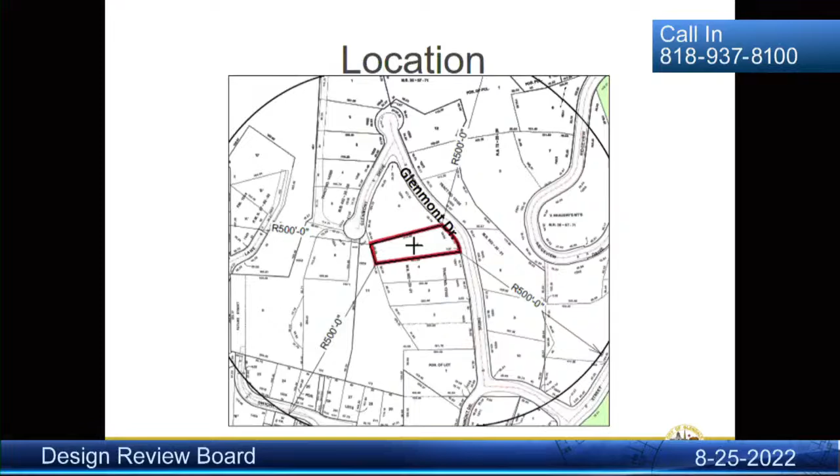The subject site is a 16,950 square foot interior lot located north of Mountain Street, near the northerly terminus of Glenmont Drive on the west side. The site is located in the R1R Restricted Residential Zone, Floor Area Ratio District 2. This zoning allows a 15-foot front setback and a maximum total floor area of approximately 4,700 square feet for this site. The existing house is approximately 3,000 square feet, which is currently consistent with the other homes in the neighborhood. It was built in 1947 and added onto 4 times over subsequent years.

It is one-story, which is also consistent with the neighborhood pattern, and has an attached 2-car garage extending from the front facade and facing the street. The site slopes somewhat at the street front and rear of the property. At the street front, it slopes upward towards the north and parallel to the street. The site also slopes up steeply toward the rear of the property behind the existing building pad.

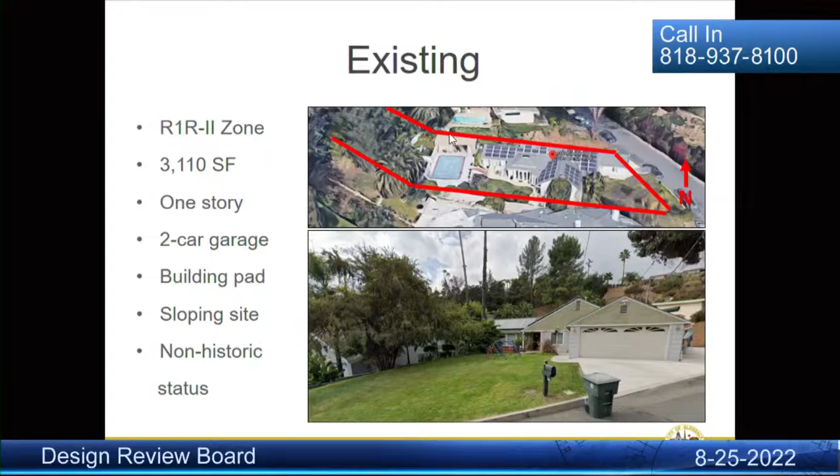The property does not appear to be eligible for historic designation and is not considered a historic resource under the California Environmental Quality Act. These photos show the site conditions as viewed from the street and as viewed from the rear of the property on the lower right.

The board decision for the project was to return it for redesign to address 3 main comments: one, reduce the mass and size; two, redesign the project to eliminate the second floor, possibly by creating a basement level to retain that area's proposed uses; and three, coordinate the fascia lines and wall heights of the addition with those of the existing house to provide better design integration.

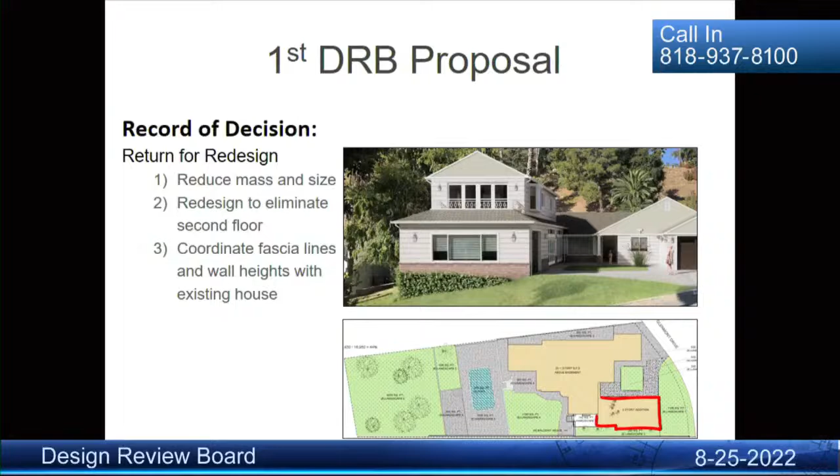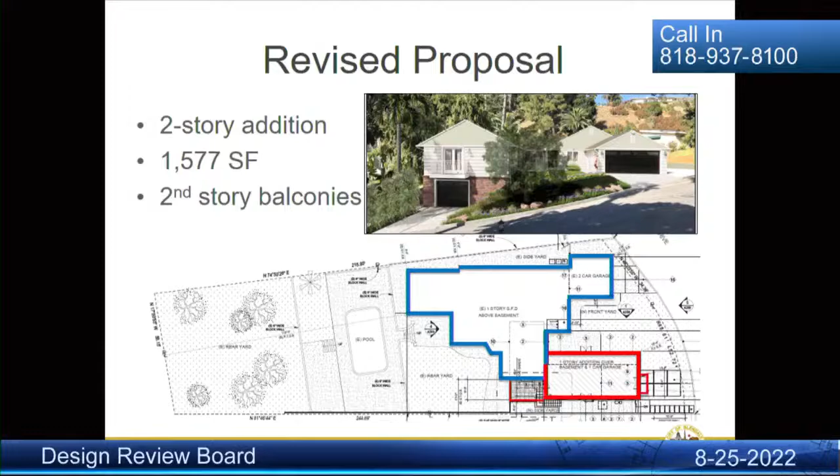In terms of site planning, the addition is located in the front yard of the subject site, extending toward the street from the front facade. However, it is outside of the front setback and behind the front facade of the house adjacent to the south. Although the new one-car attached garage location at the front isn't consistent with the overall development pattern along Glenmont Drive, it is consistent with the adjacent house to the south.

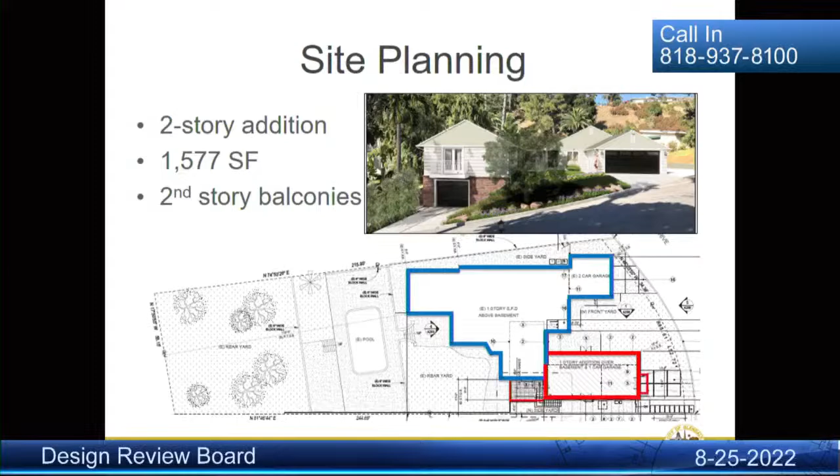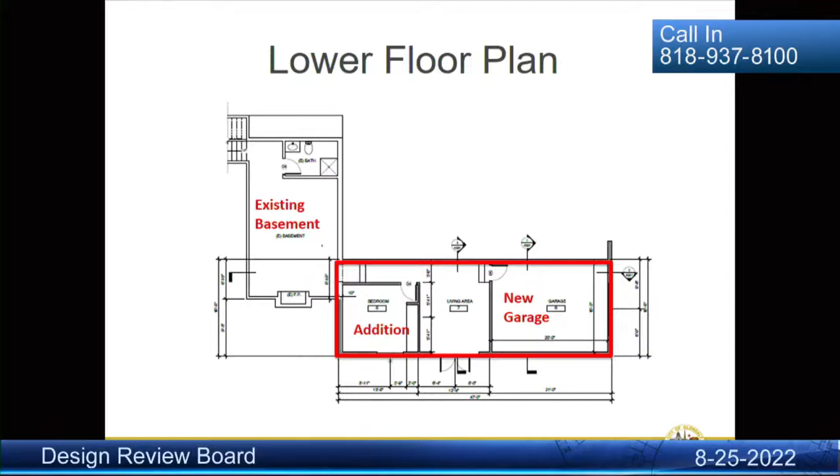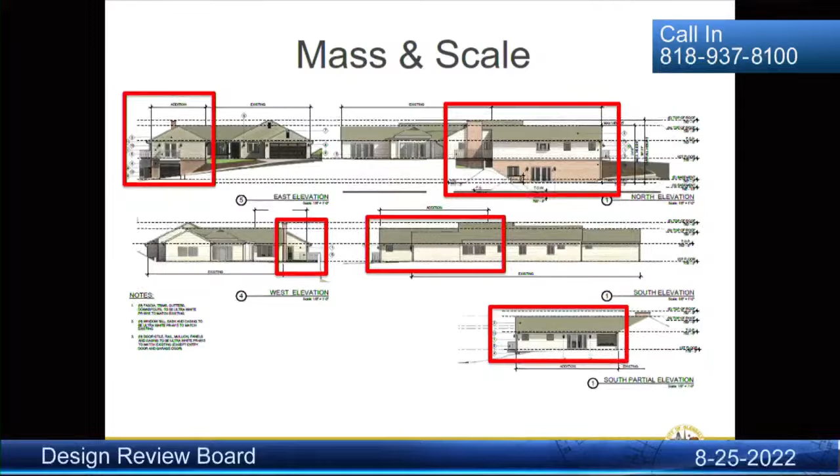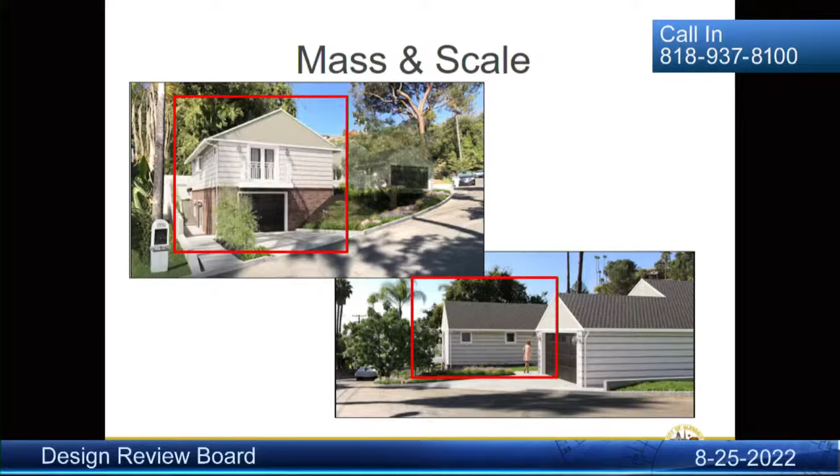The addition utilizes a variety of high-quality materials that are appropriate to the architectural style and consistent with the existing house, including clapboard siding, brick veneer wainscoting, stucco cladding, asphalt shingle roofing, iron railing with an appropriate pattern, modest wall-mounted light fixtures, and a paneled steel garage door which will be installed for both garages. A bay window adds further variety to the architectural detailing.

The new windows aren't shown as being non-sliders and recessed with sill per the design guidelines, so a condition is recommended calling for all new windows to be recessed within their openings, to have sills, and be either hung or casement in operation.

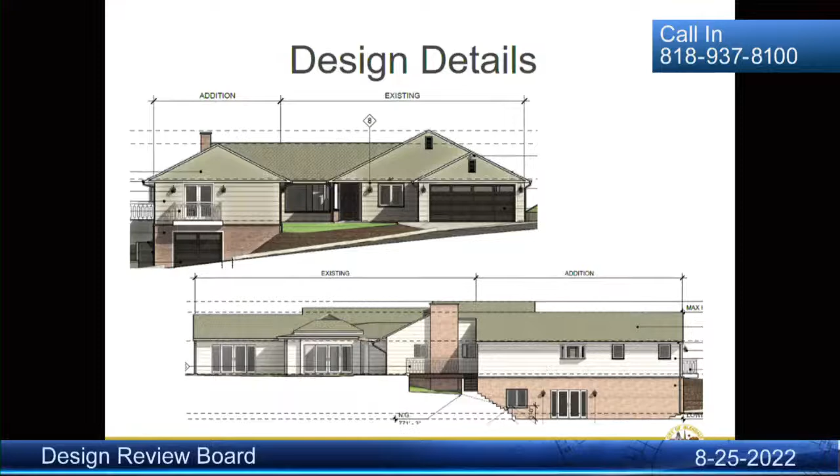The revised project has addressed the board's comments from the original proposal because the addition has been lowered to align the second story with the existing first story and push the second story into the hillside, aligning the wall heights and fascia boards to the existing one-story house. This achieves the intended effect of removing the two-story massing which previously towered above the existing house.

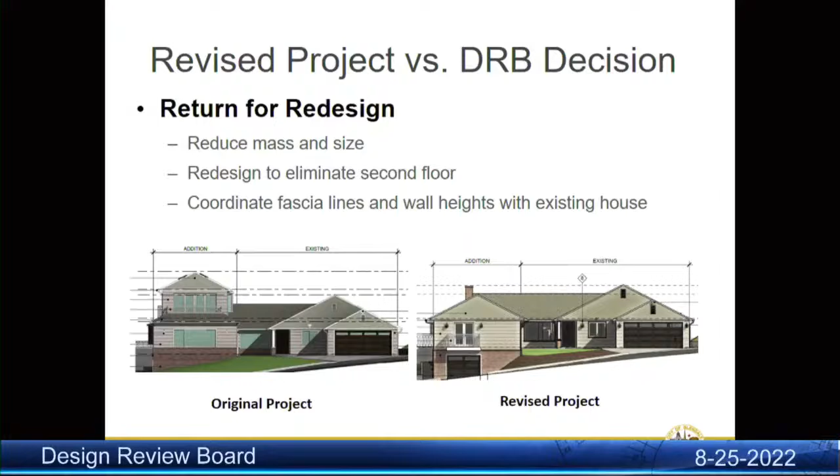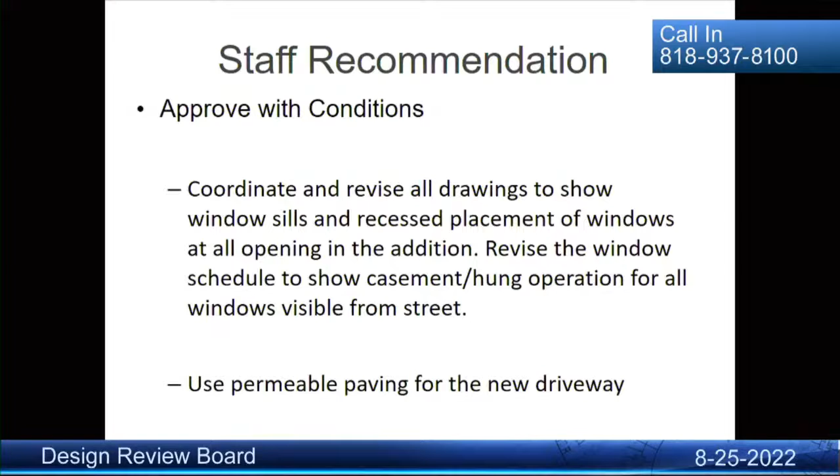As a note, two public support letters were received from neighbors who live on the street, and those were forwarded to the board prior to the meeting. Based on the information just presented, the staff recommendation is approve with conditions to address the windows and driveway paving. That concludes my presentation. Thank you.

Very good, thank you. Are there any questions? I don't have any questions at this time.

Board Member Minas, any questions? Just one question. From the new garage that is subterranean, there is a living space behind the garage leading to a bedroom.

Is this new addition, the subterranean, directly connected to the existing basement? That's sheet A103. There's an existing basement below the house, so you're connecting to it. I believe it is, if you want to pull up the floor plan. So the existing basement will be connected to the proposed addition. I believe so. I believe that was the case, yeah.

In our previous condition, we had addressed the size of the addition to be reduced. However, it's about 95 square feet bigger, but this is subterranean, not above ground, right? The 95 square foot addition is added to the basement area, not above ground. The reason the size got a little bigger is because they had to reconfigure the floor area and add this hallway along the bedroom in order to connect, and so it ended up adding a little bit of floor area.